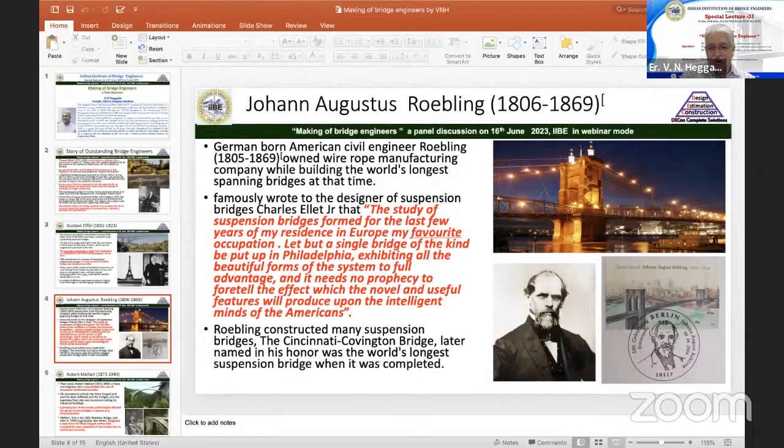Thank you, Rohi, for that nice introduction. If you can just let me have the screen now, if you just come out yourself, I will go to this presentation of mine without wasting any time. Are you able to see my screen? Yes, yes, yes. Okay, fine.

So welcome to this special session of this IIBE lecture number 33, Making of the Bridge Engineers, a panel discussion. In fact, we have some outstanding bridge engineers among us today, Vinay Gupta, Engineer Raj Shirke, as well as Mr. Alok Bhaumik. And the topic basically is making of bridge engineers.

First of all, I thought I'll just give an introduction to this particular panel discussion today before going into our panel discussion, just to understand who are the good bridge engineers. Once we understand who are the bridge engineers, the engineers who are par excellence, then having looked at the characteristics or attributes of these bridge engineers, we'll be able to really discuss on that.

Also the experience of our own good bridge engineers like Mr. Vinay Gupta, Raj Shirke, as well as Alok Bhaumik, you can hear, and we can start the panel discussion. So I'll give you a 10 minute introduction to the topic.

The story of the making of good bridge engineers, in my opinion, starts with Thomas Telford. Way back in 1757, during the period between 1757 and 1834, he really revolutionized bridge engineering, especially in the form of aesthetic bridges. His bridge, namely the Craigellachie Bridge, and another bridge, the suspension bridge which is very famous, the Menai Suspension Bridge as it's called.

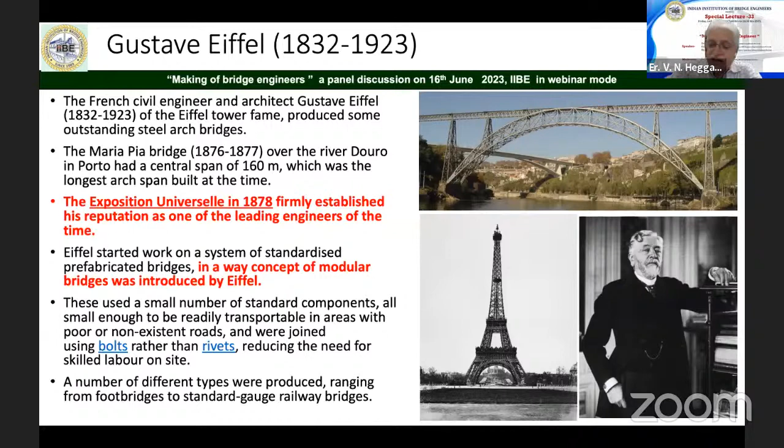Then comes Roebling, and Roebling was very passionate about constructing and designing suspension bridges. All of you are aware of it. During his time, he constructed and designed numerous suspension bridges which were holding the world record. Some of them are the Brooklyn Bridge, which was designed by him but later completed by somebody else. But the Cincinnati Bridge, known as the Roebling Bridge, was in fact designed and constructed by him. He was owning a wire rope company, in fact.

Just to understand the mind of a bridge engineer, you will have to look at the letter written by him to his fellow engineer, Ellet Jr., who was designing one of the suspension bridges at that particular point of time, and Roebling had just moved in. He says: the study of suspension bridges formed, for the last few years of my residence in Europe, my favorite occupation. Let but a single bridge of the kind be put up in Philadelphia, exhibiting all the beautiful forms of the system to full advantage, and it needs no prophecy to foretell the effect the novel and useful features will produce upon the intelligent minds of the Americans.

This is the mindset, or the idiosyncrasy, or the bent of mind Roebling had. That is the kind of passion he had. To commemorate his memory, though he finally settled down in America, born in Germany, the German government released a stamp in his memory, as you can see here on the right hand side of the slide.

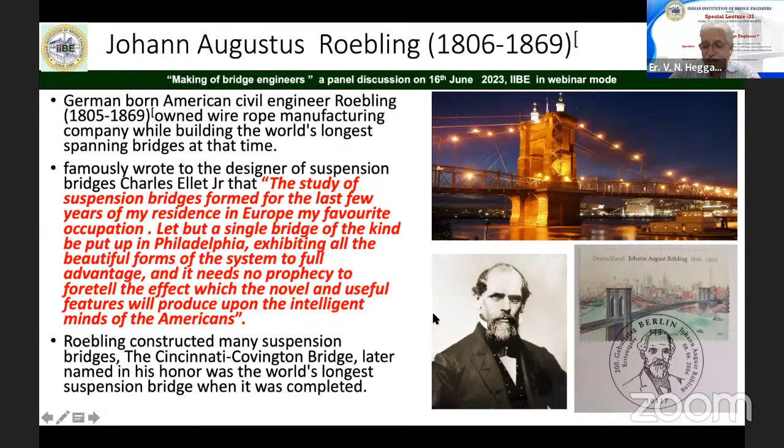Nothing can be compared to the romanticization of Robert Maillart. All of you are aware of it. He revolutionized and romanticized the use of structural reinforced concrete through his beautiful arches, a series of arches he designed and constructed. Mind you, all these people were designers and constructors, not just designers. And in fact, connoisseurs of structural aesthetics liken this series of arch bridges to the poems of a structural poet.

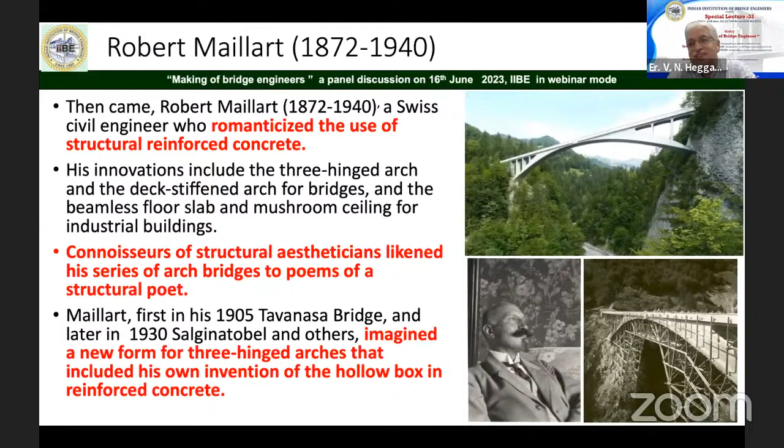And his Salginatobel Bridge, as you can see here on top. It is also said that Robert Maillart was always irked or irritated by complex mathematical calculations. He was more of an imaginative engineer, where problems can be solved by simple mathematics rather than complex algebra or calculus. That kind of engineer he was.

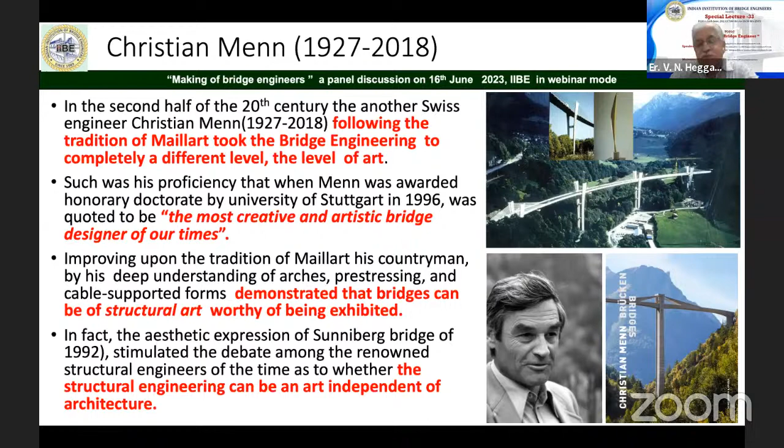Then comes, from the same Swiss tradition, another engineer, Christian Menn. While an honorary doctorate was awarded to him at Stuttgart University, he was hailed to be the most creative and artistic bridge designer of our times. In fact, he demonstrated that bridges can be a structural art worthy of being exhibited. David Billington gives a lot of credit to Christian Menn for taking structural design to the level of structural art. In fact, there were many discussions going on at that particular point of time among famous engineers, whether, like the architecture of buildings, the structural art of bridges should be separated and taught similarly to architecture, differently for bridges. That kind of discussion was going on.

All of us know Eugene Freyssinet, and when you are talking prestressing, he is always synonymous with it. In fact, his passion for the work can again be understood by his own words: 'It was in 1903 that I first had the idea of consolidating concrete by prestressing. It took me 25 years of laboratory tests and much profound thought to discover the difficulties involved and the way of overcoming them. Finally, in 1928, I decided that in order to realize my idea, I would devote all my efforts and all the money that I had earned in 15 years, during which I had worked for the Public Works Company, for the cause of prestressing.'

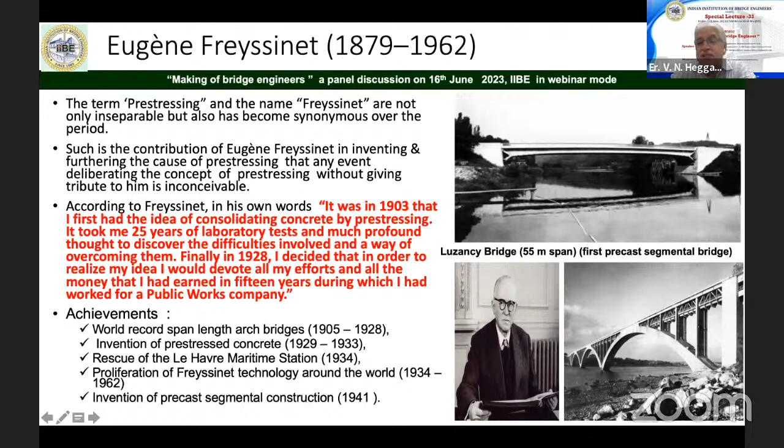That was the kind of passion he had, and he was doing everything hands-on. His achievements were many. During his period he constructed many outstanding, long-standing bridges, and he also proliferated prestressing technology all around the world. In fact, he constructed the first precast segmental bridge in Luzancy, basically in France, way back in 1941, as you can see here. He was the inventor of precast segmental construction using post-tensioning, basically.

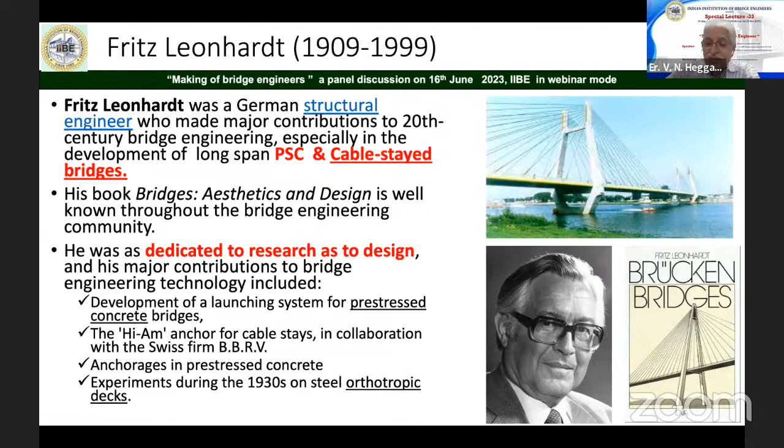Continuing with the tradition of prestressing, all of you know that Leonhardt perfected the art of designing and construction of prestressing in the form of long span as well as cable stay bridges. His book, 'Bridges', which talks about design principles as well as aesthetics, is very well known. For his research as well as his practice, he was given six honorary doctorates across Europe. That was the kind of proficiency Fritz Leonhardt exhibited.

All of us know our own Dr. Jörg Schlaich. He was a professor as well as a structural engineer, and he was a very good friend of India. He was the kind of engineer who could design as well as talk about it fluently, theoretically. In fact, he's in a way a sort of founder of a certain form finding model, which he used extensively in the design of his cable stay bridges and other bridges. His contribution in India is, as all of us know, invaluable.

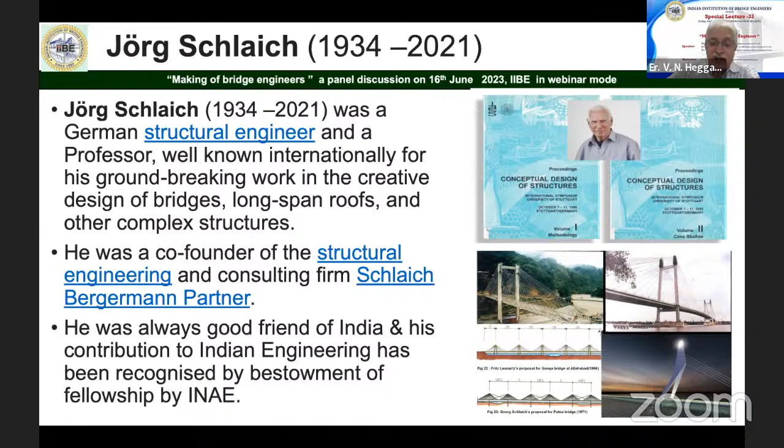So far, till the time of perhaps Dr. Schlaich as well as Michel Virlogeux, the form finding of bridges was done with the principle of form finding by the flow of forces.

Then came Santiago Calatrava. He's held to be a sculptor, architect, as well as structural engineer, and he changed the design concept. The penchant of his sculpture as well as architecture could be seen in his works, even in the bridges, of which he has done many. He started finding the form by forcing the flow of forces to his discretion. That is why it is called form finding by forcing the flow of forces. He's a master in it, and some of his bridges are outstanding.

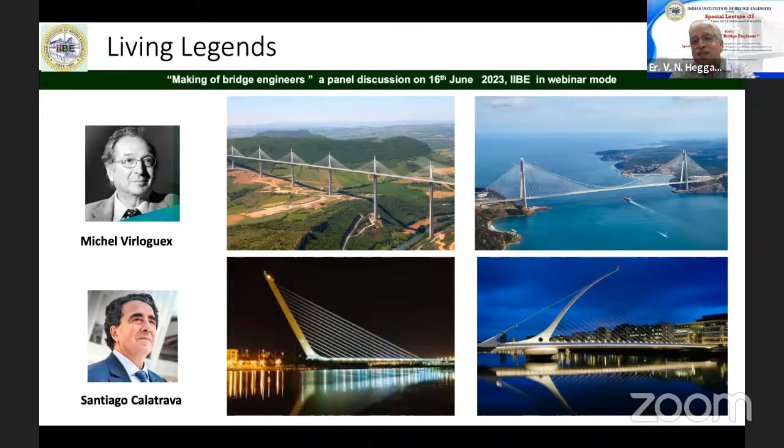Though it is said in the literature that his bridges were a constructor's nightmare, it was always very difficult to construct.

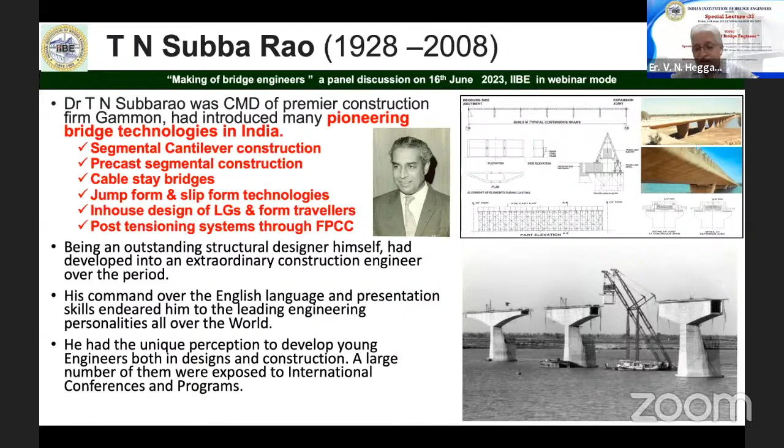Then we know, in the Indian context, Dr. Subbarao, the earlier chairman and managing director of Gammon India Limited. He introduced a lot of pioneering techniques in India, whether it is segmental cantilever construction, precast segmental construction. In fact, he's the one who introduced cable stay bridges to India, even technologies like jump form and slip form, in-house design of launching girders and form travelers, post-tensioning systems through FPCC. In the Indian context, he's one of the great bridge engineers, we can say. His contribution to the bridge engineering fraternity in India is, in my opinion, unmatchable.

Also in the same league we can see Mr. C.R. Alimchandani, who, in his own words, was sent to India to proliferate the cause of prestressing in South Asia, as he kept on saying. I thought one of his best works, stretching the limits in design as well as construction, is that of the Bhima Aqueduct. It's an aqueduct which is circumferentially as well as longitudinally prestressed. Not only that, it had to carry water, meaning it had to be waterproof, and it was done by precast segmental construction technology. That is stretching the limits.

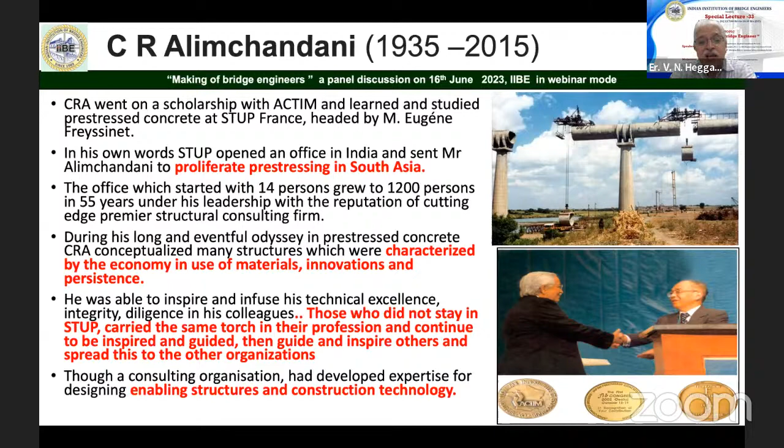He is also responsible for many of the consultancies working in India, and most of the very reputed consultancies, like Tandon Consultants or Spectrum for that matter, and many more, are in my opinion offshoots of Stup Consultants. So I think his contribution to bridge engineering, by giving the country many famous and excellent bridge engineers, is also very invaluable, in my opinion.

So coming to the last slide of mine, what made them bridge engineers par excellence, basically.

I have just tried to put some of the points over here, some of the commonalities or common characteristics which we can see. All of them were bridges between practice and research. You see any of them, especially the international stalwarts we saw, most of them were professors and also practicing engineers.

In fact, even Dr. Subbarao as well as C.R. Alimchandani, to a large extent, did the same thing. They created a bridge between practice and research. They were passionate about their work, very proud of presenting their works in conferences and seminars, and invariably participated in international knowledge dissemination forums like FIB, IABSE, learning from there.

They implemented the learning into practice in their respective countries. That's how they did that. And they were not only good structural designers, but also equally adept with construction engineering. Though they were structural designers, they took a lot of interest in construction technology.

And at the end of their career, over the period, they became some sort of construction experts also. And that's very, very important. They believed that a civil engineer is not complete unless he soils his hands at the site. That is the belief of most of these people, if you really look at it. They have a unique perception of developing youngsters in both design and construction.

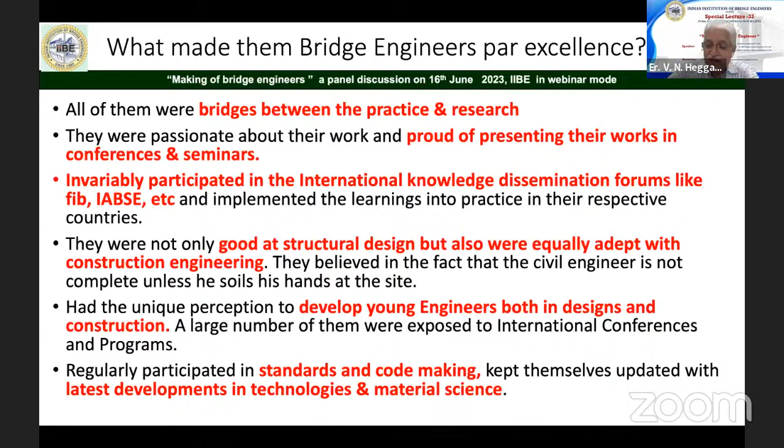So with this, we have come to our today's outstanding bridge engineers, and we are here to hear them - actually speaking, Mr. Vinay Gupta, Alok Bhaumik, as well as Umesh Rajsirke. I've given just an introduction to the topic which we are going to discuss basically today.

And what I will do is request Mr. Vinay Gupta, Rajsirke, as well as Alok Bhaumik, in that order, to give 10 to 15 minutes of presentation on how they have come to this status of being recognized as one of the good bridge engineers of the country, so that from their presentations, we can all benefit and emulate in the future to become good bridge engineers.

And I will introduce first Mr. Vinay Gupta, and he will be talking about this. After that, I will take up Mr. Raj Shirke, then I will introduce the next one. The panel discussion can take place after the completion of all these three speakers, and we'll have a small panel discussion.

After the panel discussion, if there are any questions from the audience, they can be put in the question and answer box. I'll take up the questions for discussing with the panelists.

So with this, I will come to the introduction of Mr. Vinay Gupta. All of you know him, he doesn't require an introduction, in fact. Vinay Gupta is one of our presidents of the Indian Institution of Bridge Engineers. He has, in fact, taken our Bridge Engineering Institute to the next level from the MCBD. It started with MCBD, all of you are aware of it.

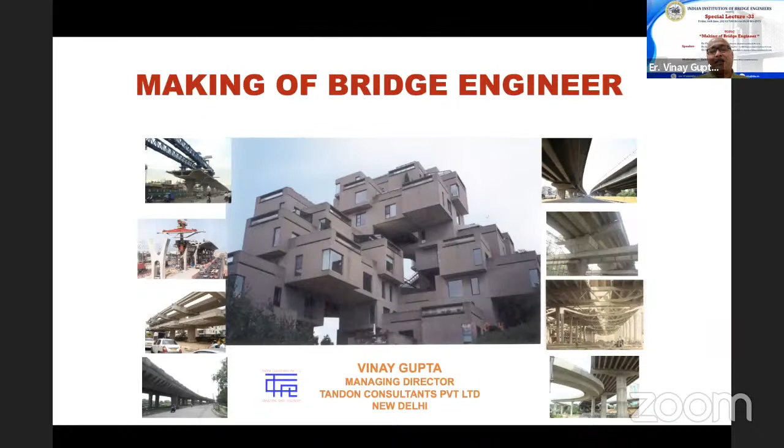As if we are fresh engineers just finishing our graduation in civil engineering, now we need to find our interest, which way we should go. Should we find our interest in buildings, design, or construction? That's a different matter - buildings, bridges, industrial structures, special structures of any kind, materials and testing, highway engineering.

Once we decide, or once we feel inclined into any of these, then we have to see whether we are more interested in consultancy, government job, construction, manufacturing and supply, or project management consultancy, which is mostly the site related supervision, and surveys of any kind. There can be many types of surveys.

We have to certainly find our interest and work towards that, at least in the beginning, and rake ourselves up to see what is my interest. So design can be one, where you do structural designs. Construction can be another - every field has its own glamour. Manufacturing and supply can be another field, wherein you manufacture construction materials, special materials, mechanical products, and things like that for civil engineering - it can even be like a crane, that is also for civil engineering.

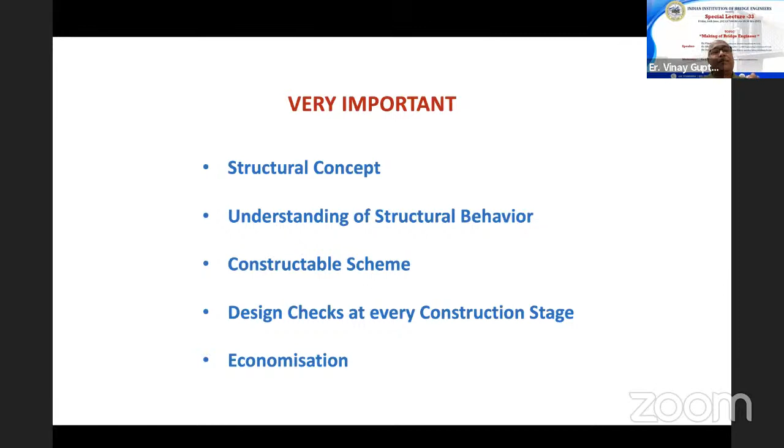And for that, you have to slowly understand which structure would be economical in the given circumstances, unless it is termed an iconic structure where cost is not the criteria, and then it becomes about the shape, the form, the aesthetics.

So coming to my own side of it, I was not driven by anybody 40 years ago. I was on my own. I had no guidance from anybody to decide what to do, going into which engineering. Even 45 years ago, when I entered engineering itself, there was no guidance on which branch I should take.

Somehow I used to see things under construction, especially buildings more so at that time, and I used to take interest in those buildings. I used to wonder why this happens, why this column, why this horizontal member, why this flat slab, etc. These things generated an interest in civil engineering. So I did that, and after doing that, again I did not know where to go.

Somehow I found that if I do consultancy, that's my interest, I also get an opportunity to visit the site and see how construction is done. I was, for myself, looking more happy there. So I said, fine, let me be into consultancy. I had an interview which I applied for, and I got selected in the first one in Delhi itself, and I got into it.

And I got so interested in the analysis, design and detailing. Especially detailing, because I wanted to see how it is constructed. That was my interest, to know that it should be constructible, because the questioning was always there that I'm doing something on my design drawing - how will somebody be constructing it?

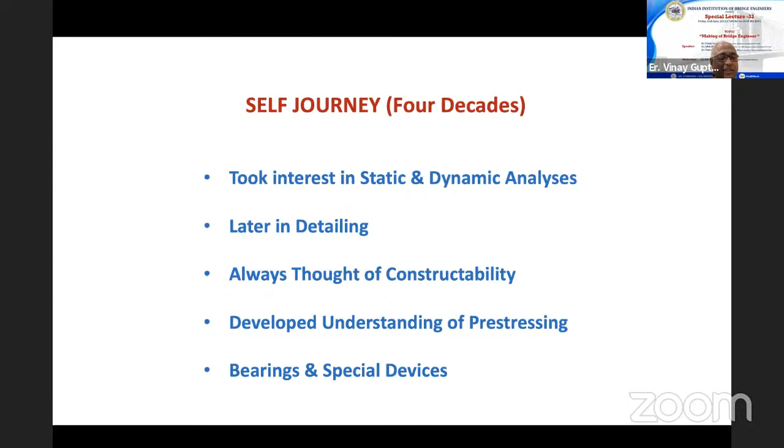Then I got into code preparation, which gave me more enthusiasm and boost. I started taking interest in technical specifications, what all they should be, and prepared quality control documents. All these things are interlinked - specifications, quality control - and you question yourself why things should be done this way and not another way, what are the merits and demerits. When I visited sites, I used to go through testing laboratories to see what they are doing, why, how, and what controls are required. This automatically kept my interest in the field.

Then I started delivering lectures, which gave more boost, imparting what I had collected over the last 30, 35 years - now it's four decades. I also joined several professional bodies. Of late I have been the president of ICI, and now the president of IIBE, and so on.

Now, the advantage of civil engineering that I see in general is that everything you do is constructed, you see it, the public sees it, whether it's a building, a bridge, a chimney, or any other structure. Once you do this, it's automatic appreciation by the masses because people have seen it. They may not openly tell you they liked it or not, but at least they have seen it - there's nothing imaginary, unlike some other fields where you imagine this must be happening. Here everything is in front of you, you see it, appreciate it, like it or dislike it. It gives a kind of confidence.

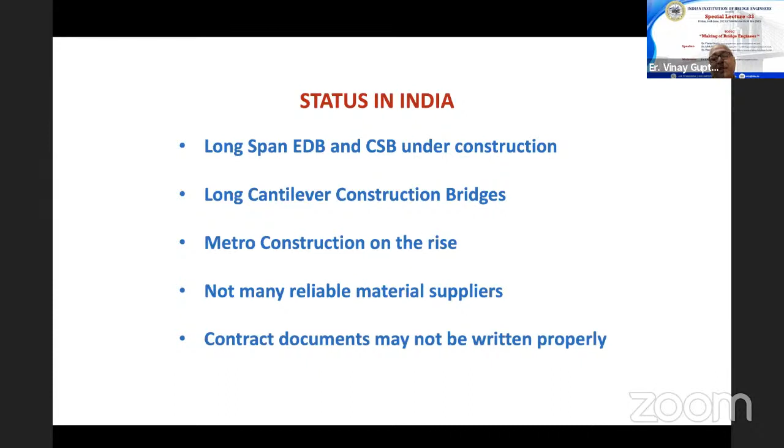But we need reliable material suppliers. We need reliability in every field, and we are a little bit short of it, I must say, in general. There are all kinds, but yes, there are problems. Sometimes the contract documents for construction may not be written properly, so they need to be streamlined in such a way that ambiguities and any kind of debates are reduced to a bare minimum.

In fact, I have been a member of course building committees, where I've always said, make bridge a compulsory course. Let people learn. When they learn building, let them also learn bridges. Make site visits, take students to site and let them realize, understand, and appreciate. That may also create enthusiasm in them to become civil engineers when they look at the site and see things happening.

Then, since educators, the faculty, taught us a lot of basic concepts, and we in industry are applying these concepts for implementation. We are the implementers. Now there must be an interaction between industry, that is we people, and the academics, so that the faculty as well as the students learn how what they taught has been implemented, and what they need to teach their students.

Thank you, Mr. Hegde. First of all, I must thank the Indian Institution of Bridge Engineers for giving me this opportunity to speak about a subject I'm very passionate about - making a bridge engineer. I have been lecturing at many places trying to encourage young engineers to come into the field of bridge engineering. So this subject is very much my choice.

We have heard Mr. Hegde's initial opening remarks, an excellent presentation giving background for this topic. Thereafter we heard Mr. Vinay Gupta, another very good presentation giving a complete picture of how he grew up as a bridge engineer and what should be done, what are the various fields - excellent presentation. In this short presentation, what I plan to give is an insight into how I grew as a bridge engineer over the last 40 plus years, and I would like to share my thoughts on how one should approach the challenge of becoming a good bridge engineer.

Just to mention, a bridge is not just a structure that fulfills the functional requirement of crossing a river or an obstacle - that's the way many people look at it, just like another structure. But it's not that. A bridge connects people. It has to meet the social, environmental, and cultural needs, because many times a bridge is an imposing structure in the built habitat, so it should not be treated just like any other structure by a structural engineer.

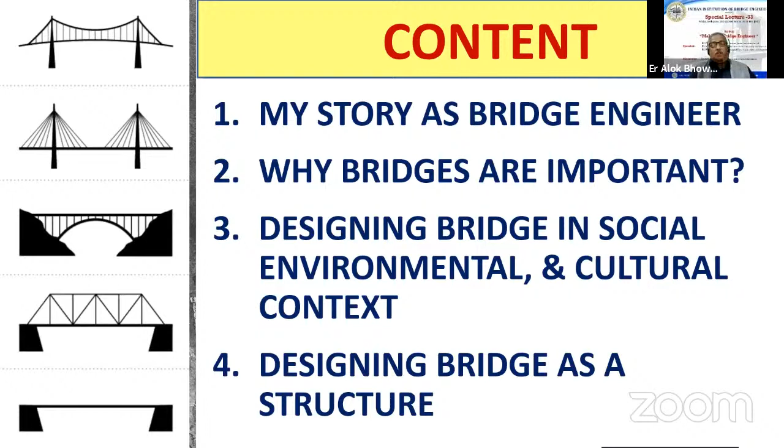And last, I will talk about the designing of bridge as a structure. This is the last in the priority, in my view - that is relatively an easy part. Once you understand the importance of a bridge, once you understand the social, cultural, and environmental context, designing of the bridge is the easier part of the work.

So let me begin with my story. What you see here is my name card with a long list of credentials. Generally, I don't use these long lists in my letterhead or anywhere. There is a specific purpose for which I am showing this here. This slide illustrates the learning path that I had gone through since I graduated in 1981. I passed out from Delhi University, BSc Civil Engineering.

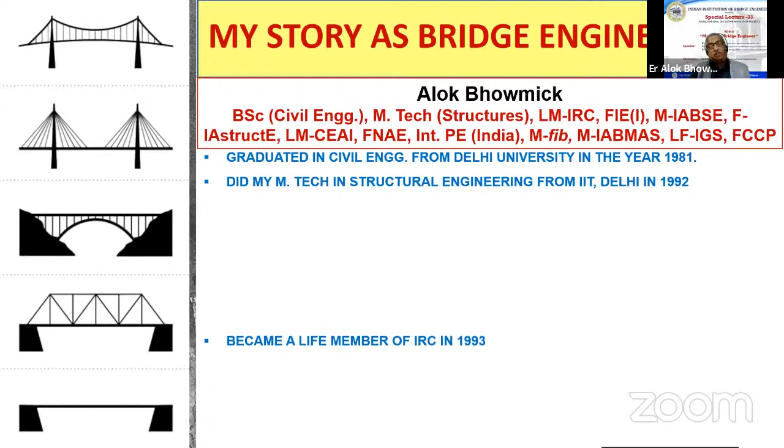When I did my post-graduation from IIT Delhi in 1992, I was a part-time student there. At the time I was working in a consulting field. I became a life member of Indian Roads Congress in 1993, became a member of Institution of Engineers India in 1995. Later in 2002, I became a fellow. I took the membership of IABSE in 1995. I became a fellow of IAStructE in 2005, and I served Indian Association of Structural Engineers as president from 2019 to 21. I took life membership of CEAI in 2018.

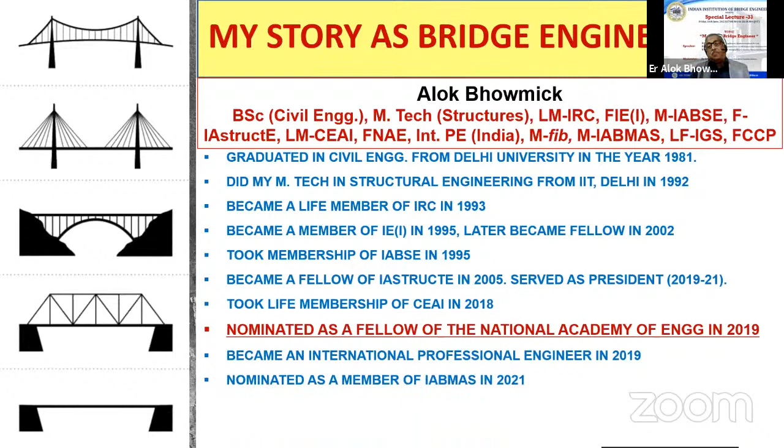I was nominated as a fellow of the National Academy of Engineering. I consider this as one of the topmost honors that I have, in 2019. I became an international professional engineer in 2019. I was nominated as a member of IABMAS, which is the International Association for Bridge Management and Safety, in 2021. I became Life Fellow of Indian Geotechnical Society and a Governing Council member in 2022. And I also appeared for an exam and qualified as an FIDIC Certified Consulting Professional in 2022.

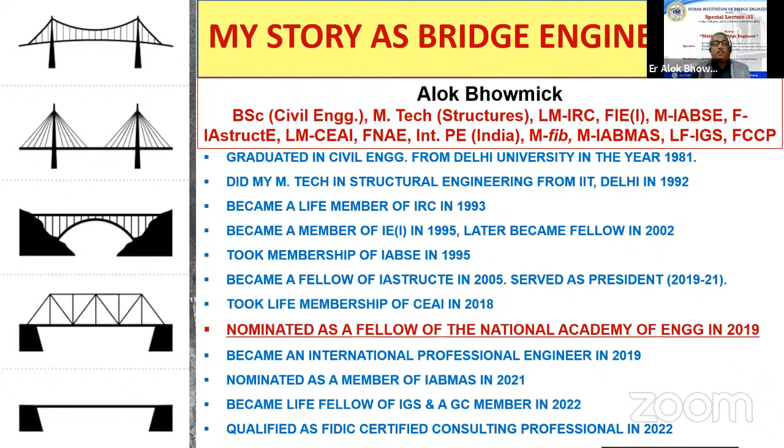Reason I'm showing all this is to highlight the fact that if you want to grow and become a good professional who would be recognized, then you need to be continuously upgrading your skills. That is the first lesson which I want the participants to learn. You can see I have been continuously upgrading my skills, which has helped me immensely in the profession. All these professional associations of which I'm a member have helped me maintain high professional standards, which in my view is very much required - the fact that you are following certain codes of conduct given in these professional associations means that you are on the right track. And I think this helps you a great deal as an engineer.

Now coming to the industry experience, after graduation I worked for about 15 years in various consulting firms. The last one being in Malaysia with a firm called HSS Integrated Sendirian Berhad. And in all these consulting organizations I have worked in bridges. Last 20 years, I have been on my own, started 20 years back with my wife as a partner. She is also a bridge engineer, civil engineer, and structural engineer.

Initially when we started, there were a lot of advices from my friends, most of them negative, saying that it's a stupid idea to start a structural engineering consultancy - there is no money. And to a large extent, maybe they are right. But I had some passion in the consulting, and despite all the advices against, I started.

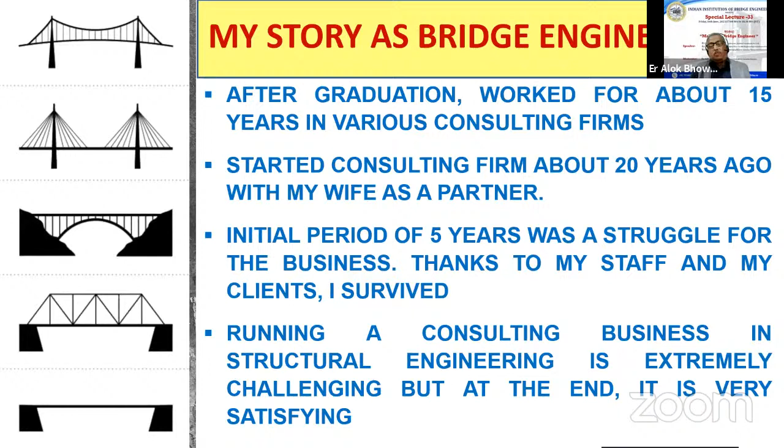And I can tell you that the first 5 years when I started were really a struggle. Thanks to my staff and also my clients that I survived. Thereafter, of course, it was an enjoyable journey, and I'm still enjoying the challenges, both as a structural engineer and also as a businessman. The challenges that I'm facing day in and day out give me a lot of pleasure. It gives me a lot of satisfaction.

Coming to the next section, why bridges are important. Bridges are indeed important for society. I have explained that before, because they connect people and link communities. As a bridge engineer, we must be aware of the societal needs that bridges fulfill, and we must be sensitive to the expectations of the public, developing skills so these requirements can be fulfilled. It is not sufficient to just fulfill the requirement of your immediate client as per the terms of reference and tick the box. That is not what bridge engineering is all about. Your ultimate client is society, the public, and you need to win the hearts and minds of the people you are delivering for. This is to be remembered.

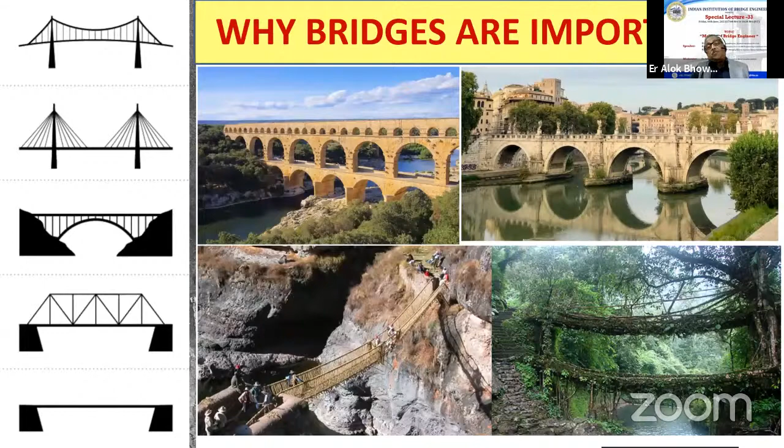So bridges are not just a structure which connects. If you study these bridges, what you see in the bottom right is the timber bridges in Meghalaya from long back, called living root bridges. These are ancient bridges where people used their minds and wisdom. What you see on the bottom left is the grass rope bridge, made with leaves and tree trunks, which have a limited life of one or two years, and the community keeps rebuilding them. This is the kind of history of bridge engineering we are talking about.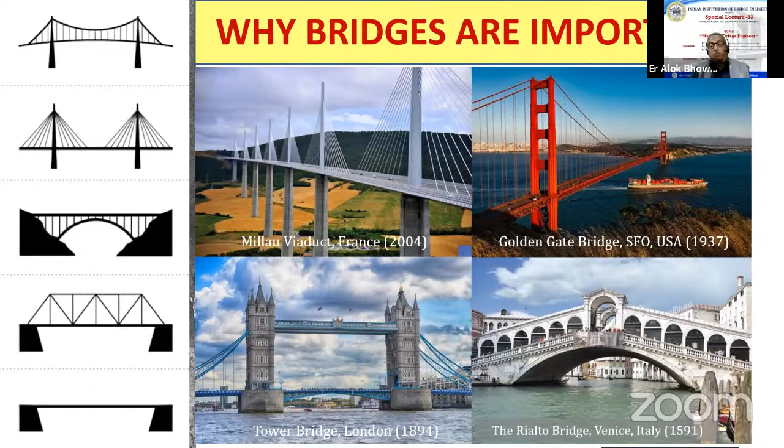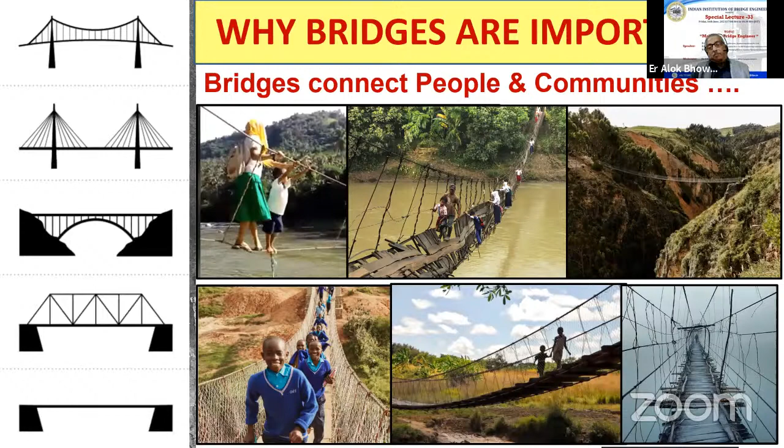There are other bridges which are lifelines in rural areas. Even today, there are more than one billion people living in poor and rural communities around the world, who do not have easy access to basic needs. For them, these bridges provide connectivity so their children can go to school and college, and they can visit health centers. So as a bridge engineer, when you design a bridge, we have a duty not just to address the functional requirement, but also to make them robust. There is a video, a four-minute video by the World Bank, recently created, which I got just yesterday and wish the organizers would show after this presentation. It shows how bridges have helped bring resilience in Uttarakhand after the 2013 floods. That is the kind of responsibility a bridge engineer needs to understand when he takes up this subject.

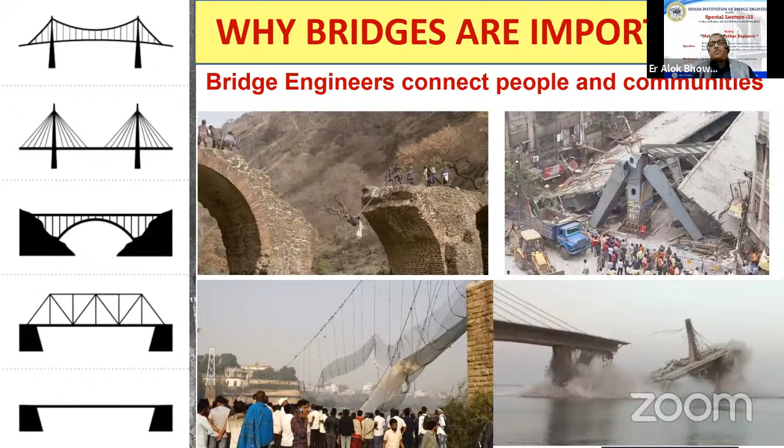We have seen many failures, such as the failure of the Bhagalpur Sultanganj Bridge. When a bridge fails, the community struggles, and development stagnates in that city, particularly when an operational bridge fails. People suffer, and apart from the huge economic impact, even during construction if a bridge fails, it delays the project by maybe 5, 6, or 10 years. So the whole community struggles when a bridge fails. That may not be true when a building fails, where the damage is only localized, whereas when a bridge fails, the entire community suffers. We need to understand this. Now, coming to designing the bridge in social, environmental, and cultural context, let me talk a little bit about this.

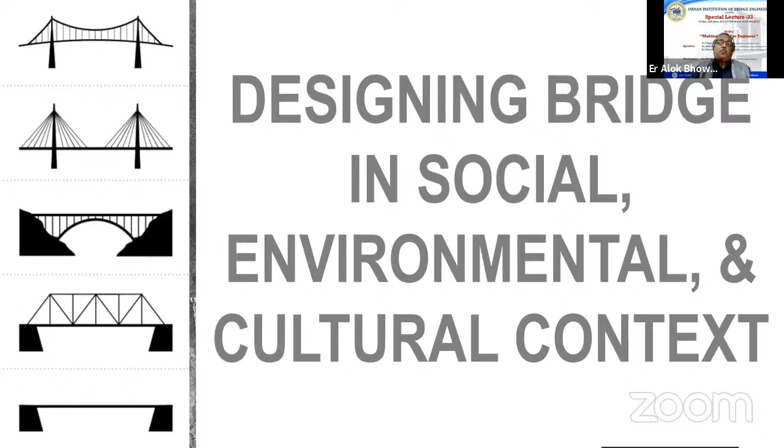There is a need for taking into consideration the environmental factors and the societal factors. We are, as you all know, in a climate emergency today. This is a completely new paradigm where we have to think differently. It is not there in any textbook or in any codes or standards that we have been following so far. We have to develop a new standard for us. Reducing greenhouse gas emissions, reducing the carbon footprint in bridge construction is an added challenge today for bridge engineers. As we all know, these bridges that we are constructing have a very high embodied carbon, and therefore there's a great challenge forced upon us to reduce the carbon footprints.

The bridge design considerations are also different depending upon what type of bridges we are designing for. When we are designing railway bridges, I'm not just talking about the difference in the loads - that is, of course, there. But other than that, the attention to detail also will keep changing depending upon the functionality of the bridge in the environmental and social context.

For example, if you are designing the railing and other things for a railway bridge where the vehicle moves at a very high speed, you don't need to pay much attention on the detail of the railing. Whereas when you are designing a pedestrian bridge where the movement of people is slow, they will be on the railing, they will be walking along the pavement. The details of the pavement, the details of railing, the details of illumination on top of the deck are extremely important, other than the structural detail.

When you are designing, for example, an urban highway bridge, all the details matter because one can be moving on the surface level, one can be moving on top. Each and every detail has to be looked into from the social context.

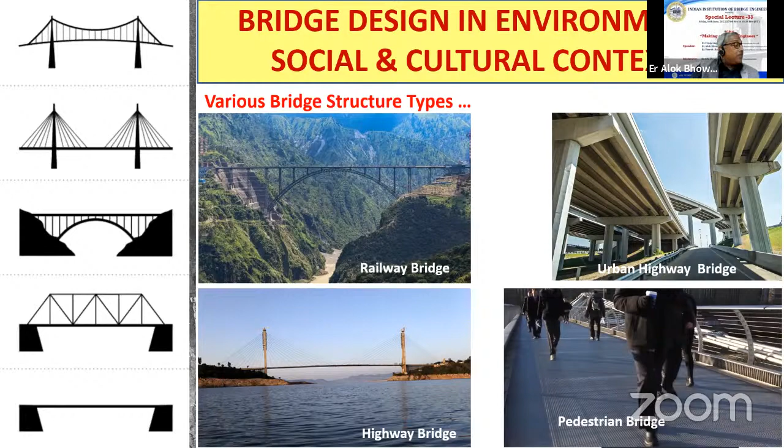These are some bridges which I think Mr. Hegde also touched upon, that we need, as a bridge engineer, to derive inspiration from great works done by our predecessors, our role models. These are just a few examples. One is this bridge, the Millau Viaduct - a stunning bridge in south of France, designed by not only Michel Virlogeux of France, but also, I think, Norman Foster. Together, jointly, they have done this spectacular bridge, which is a spectacular synergy of architecture and engineering, as Mr. Hegde mentioned.

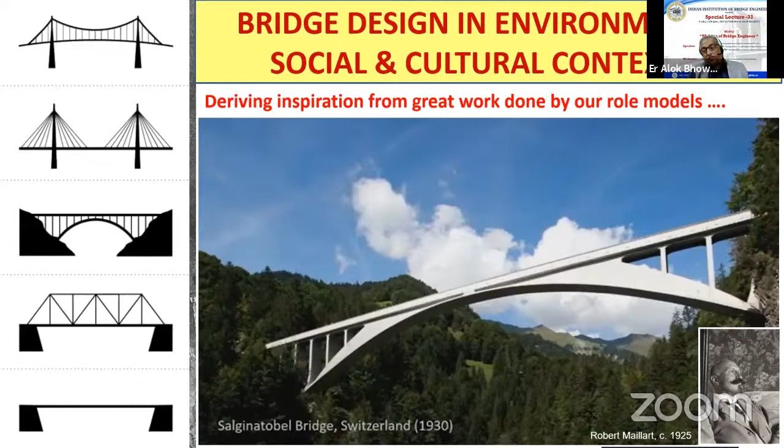He also showed this Salginatobel Bridge in Switzerland, which was designed in 1930 by Robert Maillart, and I think he also did the construction. It's an absolute sublime bridge - a masterpiece, and even today, when tourists visit the area, this is also one of the tourist spots there.

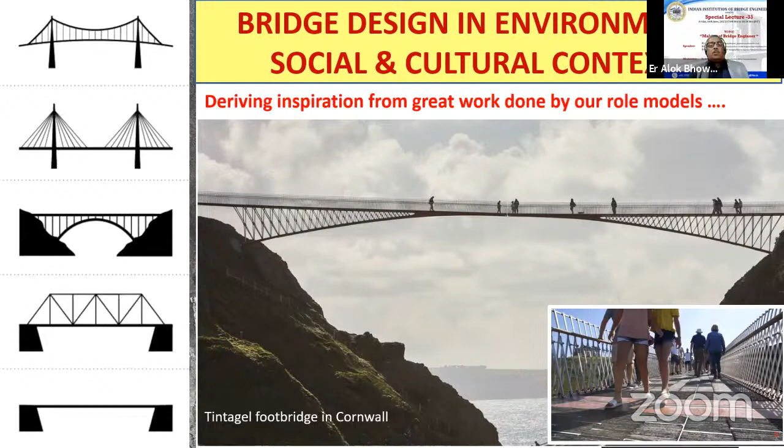And mind you, these are not just iconic or signature bridge structures. It's not that because it is a signature structure, it has to be good - there are routine bridges as well which have to be good. I will quickly go through some of these bridges from which we draw a lot of inspiration.

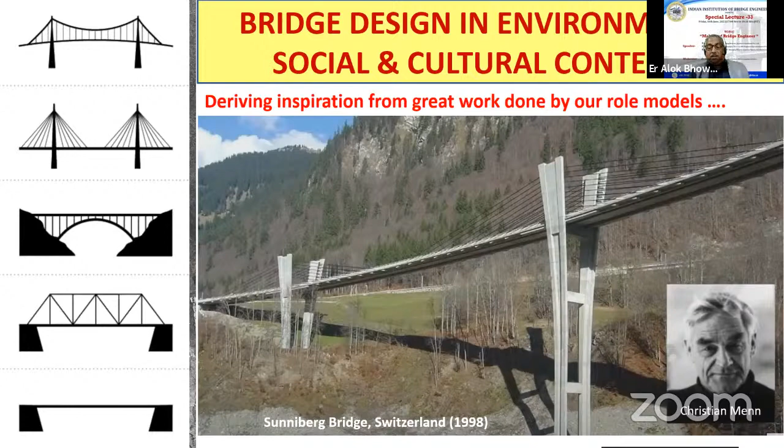This is one in Switzerland done by Christian Menn. I think Mr. Hegde mentioned about Christian Menn and also his works. This is a bridge designed by Jörg Schlaich, father of our friend Mike Schlaich, who has been very instrumental in many projects. Both father and son were instrumental in, I think, several projects in India, including Vidyasagar Setu and Signature Bridge, Delhi. And this footbridge is one of his masterpiece creations.

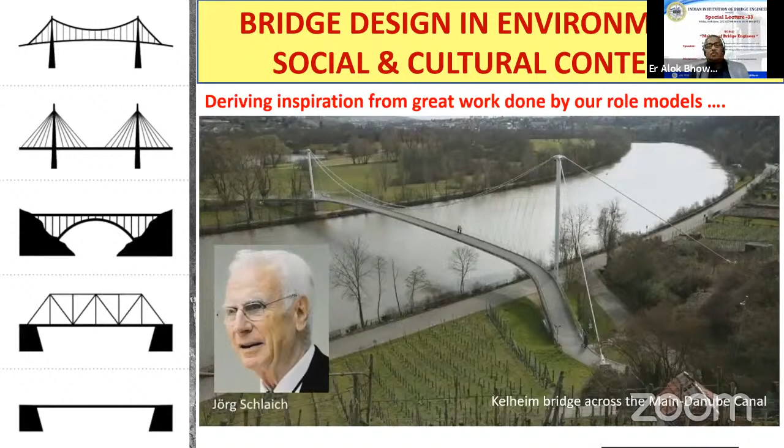Jörg Schlaich, by the way, is not only a passionate structural engineer - he has not only excelled in bridges, but I think he has done pioneering work in lightweight construction using tensile structures, solar energy, and name any of these and go through the work done by him. It is very, very inspiring.

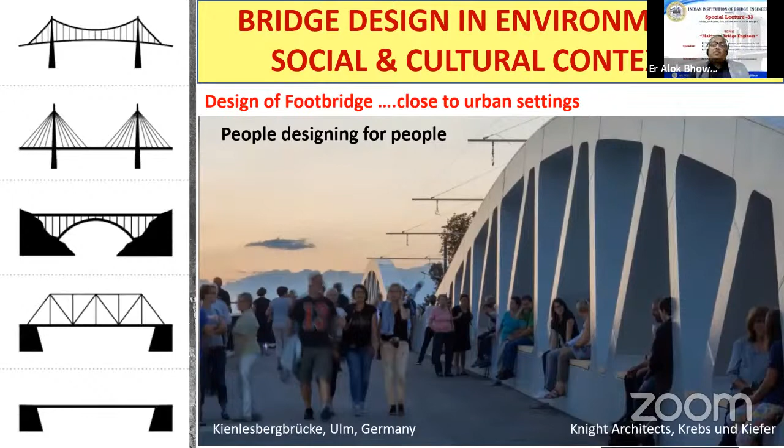This is a good example I wanted to show, something different - a footbridge in an urban setting, an award-winning bridge, showing how the bridge detail connects so well with pedestrians. You see, it's part of the design that this bowstring arch bridge keeps the top of the bottom chord at a level intentionally kept for pedestrians in this urban area to sit leisurely, gossip - this is what contextual design means. We have some bridges in India which are very inspirational, but unfortunately they are few and far between.

Unfortunately, our academic institutions and engineering colleges do not teach aesthetics for structural engineers the way it should be taught. And that is perhaps one reason why many of us in the profession are insensitive to aesthetics.

Even if there is a cost addition of 1% or 2%, generally the client would say, 'No, let's go with this one instead.' Look at metros in Delhi - I have seen in many corridors, the same corridor, two columns will be circular, the next one, due to some reason, becomes rectangular, and the next will be a different shape. Suddenly, from a box girder you will convert into an I-girder. Nobody is looking at the whole project in integrity as one.

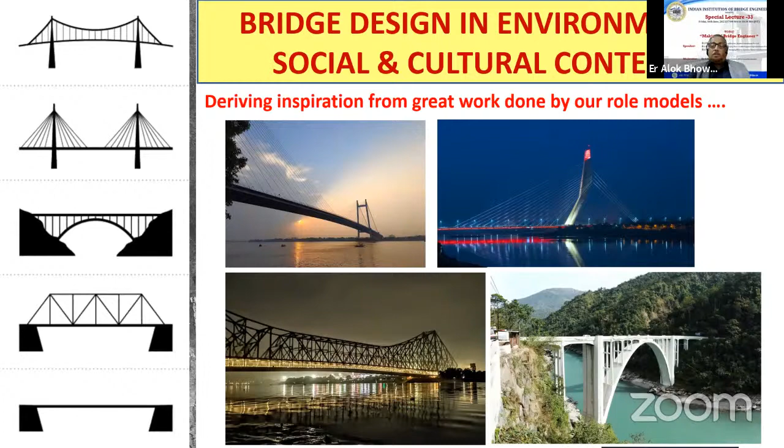This is an area where, as an engineer, you need to create your own kind of expertise and make sure that it is aesthetic.

I'll give two examples of what you should not do. One is the famous Alamillo Bridge, which Mr. Hegde also mentioned - a Santiago Calatrava creation. When you design a bridge, you have to satisfy the requirements of cost, optimization, aesthetics, integration, environment - everything. It's not just to meet one criterion and forget the others. The Alamillo Bridge in Spain is a good example where aesthetics have been satisfied more than required there, and as Mr. Hegde mentioned, form follows function was completely reversed - that is the trend of Santiago Calatrava.

This bridge cost almost 5 times the normal cost of a bridge, and therefore the public there and the authorities heavily criticized it. Even after post-construction it was a matter of criticism. But if you look at the bridge, it is one of the icons there, aesthetically very good.

Look at another example which is not acceptable - the Delhi Metro structure in Delhi. I took two photographs. This is in the heart of the urban area, and you can see how it's treated - when you have a long span with height, and suddenly a short span. Not only that, the painting is done only where vehicles cross at the center, as if the other part doesn't require painting. This is very insensitive.

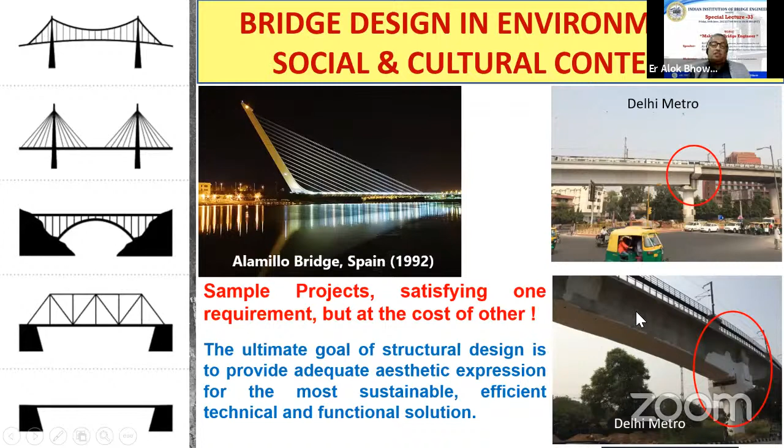Look at the one at the bottom - this is a very insensitive way of maintaining our structures from an aesthetic consideration. It only shows insensitivity to aesthetics.

Coming to the last part of my presentation - how does a bridge engineer go about conceptualizing and creating a structure that satisfies all the stated and unstated requirements I mentioned earlier. There are 4 stages of a bridge project: first a concept design, then a preliminary design, then a detailed design, and a construction stage. The purpose of conceptual design is to come up with various feasible bridge schemes, decide on one or more final alignments, decide the alignment and overall design, and decide the broad concept for further consideration.

Concept design is a process of form finding, as Mr. Hegde was mentioning, which is the most important phase of the design. Generally, it is a very experienced person who works on the concept design - this is the initial but most crucial step in the bridge project. Mostly this is the responsibility of the client or the feasibility consultant, the DPR consultant, and in some cases even the contractor does the conceptual design, though generally it is the client and DPR or feasibility consultant who does this.

When it comes to preliminary and detailed design, that is the next stage. The purpose of preliminary design is to select the best scheme from the proposed concepts, ascertain the feasibility and constructability of the selected concept, and finally refine its detail and estimates, based on which the tenders are floated.

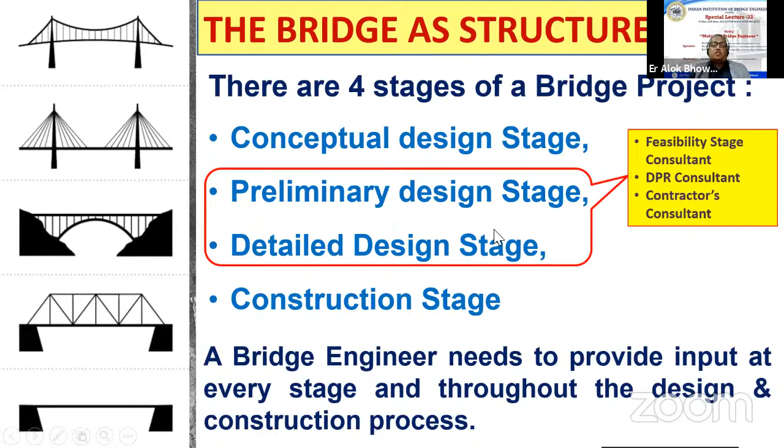The construction design will be much more elaborate, where each and every stage of construction will have to be analyzed in great detail, as Mr. Vinay Gupta was mentioning. Mostly in an EPC mode of contract, this is done by the contractor's design consultant. A bridge engineer needs to provide input at every stage, be it at the feasibility stage, DPR stage, or as a contractor's designer.

So if you want to be a good bridge engineer, you have to learn all these four stages very meticulously, and that is where the experience lies.

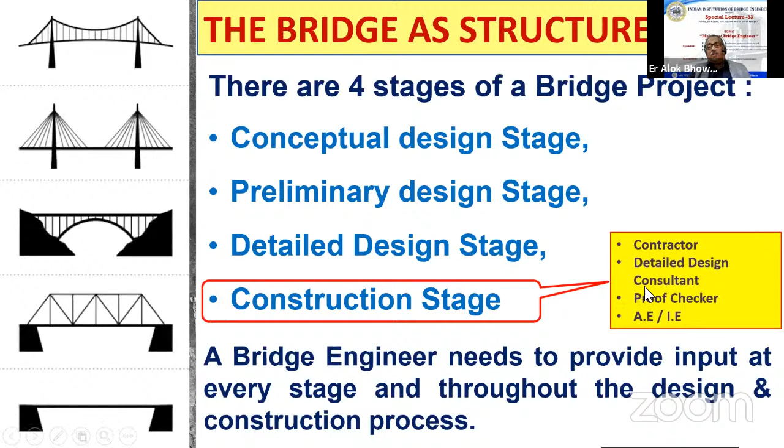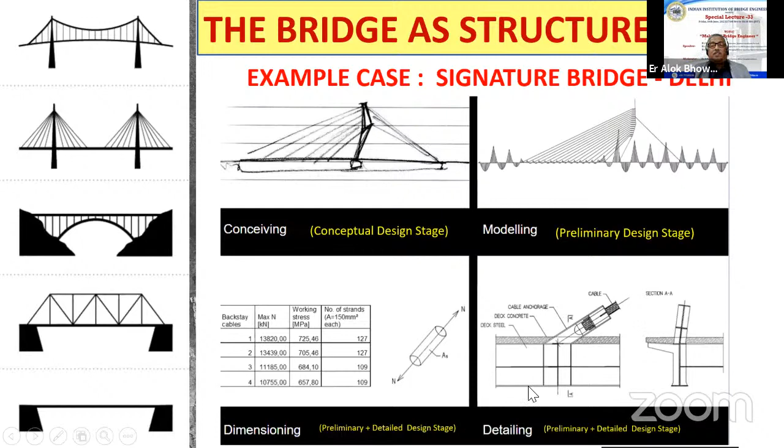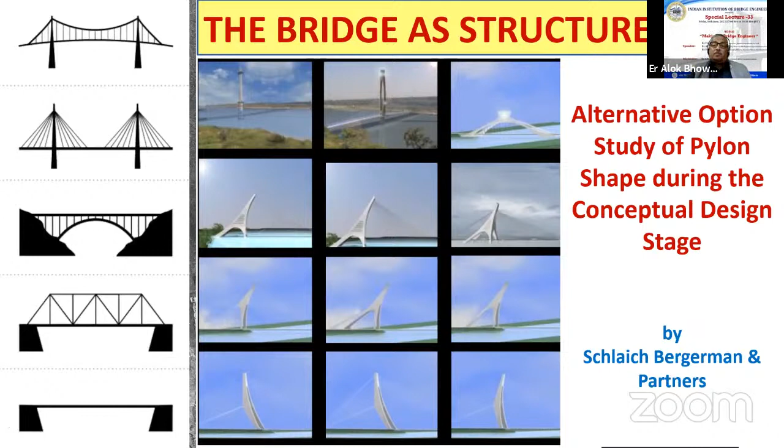But you have to understand the very basic concept: you need to study various concepts, whether it is a simple bridge, a complicated bridge, or a signature bridge. You need to come out with various alternative concepts, weigh the pros and cons from cost, aesthetics, and all aspects, prepare a matrix, give them some weightage, and finally choose a solution best suited to that particular structure.

So in conclusion, I would like to say that bridge design today is a multidisciplinary task. All different expertise is needed when we build a bridge. It is not just a structure to be designed with steel and concrete where you only optimize the cost - no, that is not so.

Today we are in a climate emergency. We have to take care of the climate. It is the politics that we need to worry about. It is the environment that we need to worry about. And it is the natural resources that get recycled that we need to worry about. All this comprises a bridge design activity.

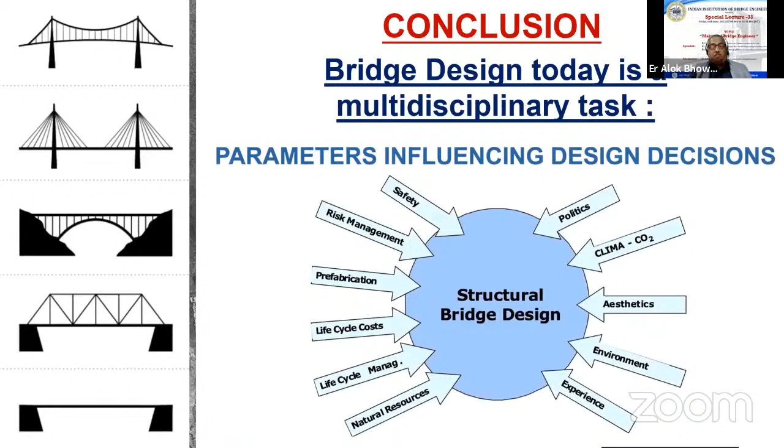It's not necessary that you have to be an expert in everything. But if you want to take a lead as a bridge engineer, you need to understand each and everything. You may not be an expert - you may be taking the expertise of one particular aspect, but in other aspects you should have fairly good knowledge so that you can be at the decision-making table, taking a lead position.

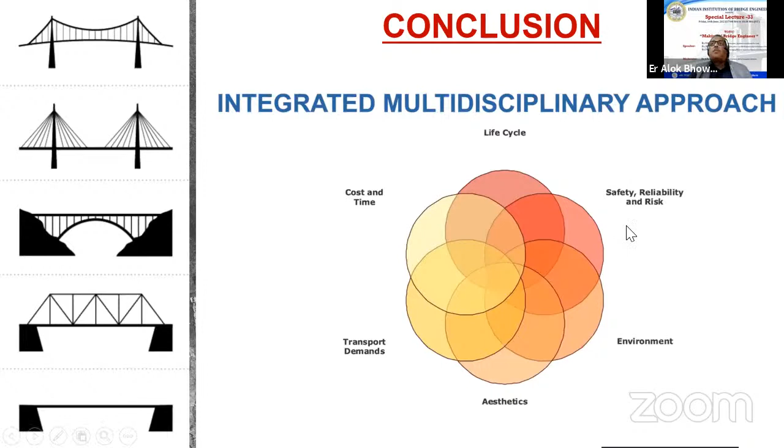Bridge engineers have to adopt an integrated multidisciplinary approach, pooling the knowledge of all special experts into one unit and creating this structure we call a bridge.

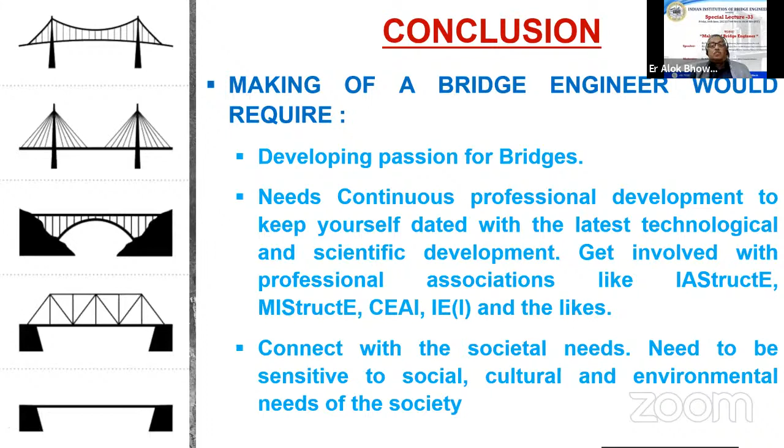So, last slide: making of a bridge engineer would require developing a passion for bridges. There is a need for continuous professional development to keep yourself updated with the latest technological and scientific developments. Get involved with professional associations like IAStructE, IIB, MIStructE, CEAI, Institution of Engineers, and the likes. Connect with societal needs - you need to be sensitive to social, cultural, and environmental needs of society.

Innovation is vital in bridge engineering. It should be in the DNA of every bridge engineer. One can't be a good bridge engineer if she isn't wanting to innovate. You just don't follow conventions and be happy - every structure is unique, every bridge is unique, and you can find something new and learn something new in that.

But only a word of caution is that innovation shall be done from a position of knowledge and strength. It's not a good idea to do innovation with half knowledge. That will be dangerous because safety is a prime concern here.

Thank you very much. With that, I have come to the conclusion of my session. I think I have taken a little more time than what is allotted, but yeah, thank you, Alok.

I think though you have taken time, it has been a fascinating journey as a bridge engineer. I can see that. And also you have explained what inspires you, like showing examples of Calatrava, and so many good engineers like Schlaich, Christian Menn, and Robert Maillart. And that's what the inspiration is all about. And also, in a way, you have explained the design process, which is a good design process that has to be followed. We'll take up all these things at the end of Mr. Umesh Rajeshirke's talk as a panel discussion. If time permits, we'll have a long discussion over there. And with this, I invite our next speaker, Mr. Umesh Rajeshirke.

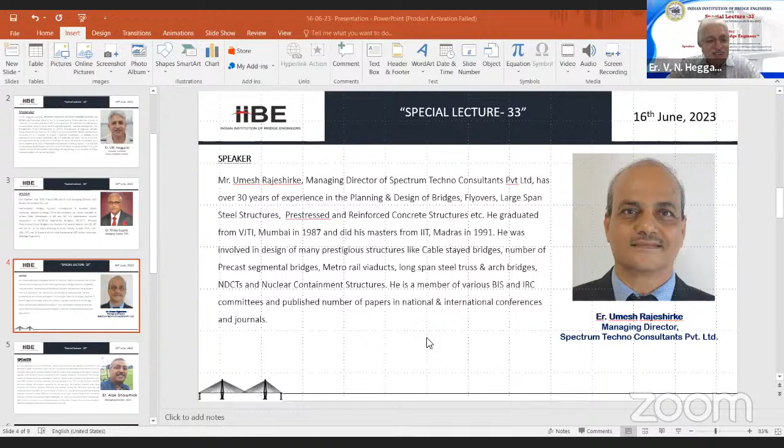Umesh Rajeshirke is a first generation entrepreneur, similar to Alok Bhowmik. He had worked in Stup and was one of the prominent engineers of Stup Consultants. Stup has produced some of the finest bridge engineers, not only bridge engineers but structural engineers in this country, and his consultancy firm, Spectrum, is one of the offshoots of Stup Consultants. Rajeshirke is a postgraduate from VJTI, graduate from VJTI, and did his post-graduation from IIT Madras. He has been involved in cable stay bridges and long span cantilever bridges, and in addition, in the design of nuclear containment structures, natural draft cooling towers, etc. He regularly attends international FIB as well as IABSE symposiums and conferences. Our country has very few designers who have done multi-span cable supported bridges. I think Rajeshirke is one of the very few multi-span cable stay bridge designers in this country.

With this small introduction, Shirke, I'll hand over this podium so you can take over. You have 10 minutes, if it's possible for you to complete. Actually, what has happened, Heggadeji, is that all three of you have already spoken most of the things which I had covered in my presentation. So while you were speaking, I have deleted many slides in my presentation. Fine, fine, so that will make things... I may take hardly 5 to 10 minutes. I will not go through all the things which all of you have talked about earlier.

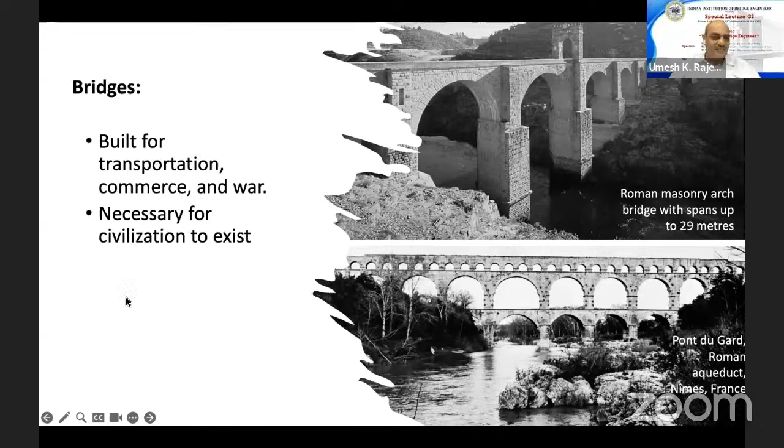So this is again, bridges built for transportation, commerce, and also for war. During many wars, the attempt is to destroy the bridges to win the war. So that is another aspect of the bridge we should mention. It is necessary for civilization to exist. And again, as all of you have said, these are iconic structures. Many cities are identified by the bridges they have in their cities. And hence it is obviously the most exciting career in civil engineering.

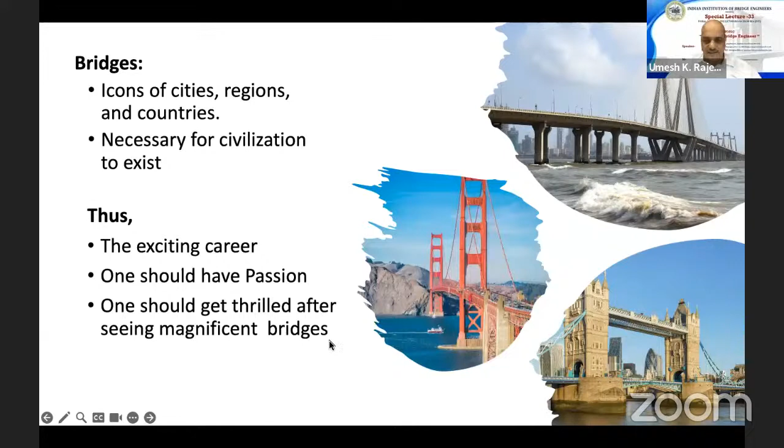One should have a passion to build that career and should get thrilled after seeing these magnificent bridges. And the most important or fascinating thing is that you deal directly with nature. That is the excitement I find. You have to deal with gravity, you have to deal with wind, the kind that the cyclone has been making noise about in the last 2-3 days. Then you have to design for earthquake, moving loads, cyclic loads, fatigue. So that makes these particular structures very interesting for any engineer.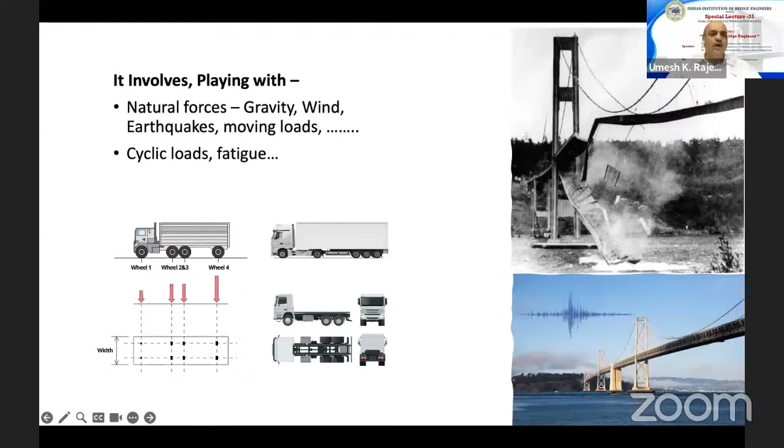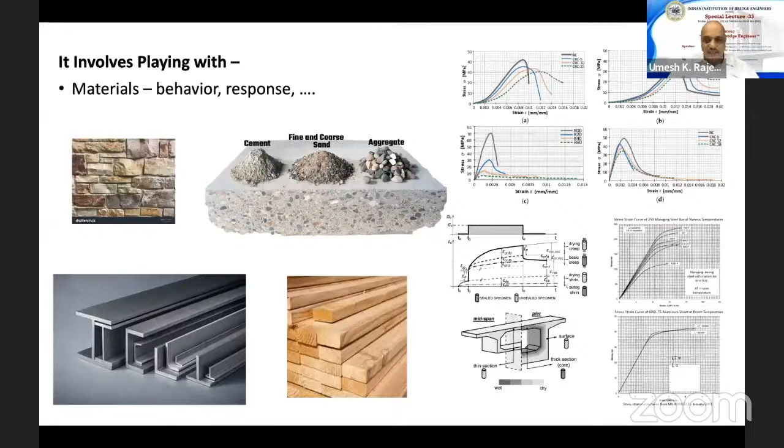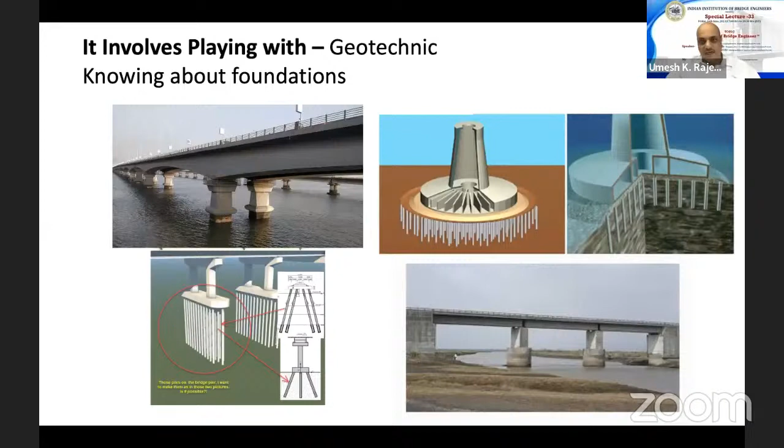And then you have to play with the material, whether it is masonry, concrete, steel, or timber. You have to play with their material properties, their response to loads, long-term, short-term, creep, shrinkage, fatigue, whatever it is. So we have to learn those properties and play with this material. Again, you have to play with another uncertainty, that is the foundation. There are a number of foundations like the open foundation for the Thane Creek Bridge, pile foundations for many bridges, and well foundations. So you have to choose the appropriate foundation. That is again a very important decision we make. Again, you have to play with a number of structural systems, as Alok and others have said in detail. So in the concept and planning stage, you have to choose the appropriate structural system. You have to see the constructability, the cost and economics of that particular solution.

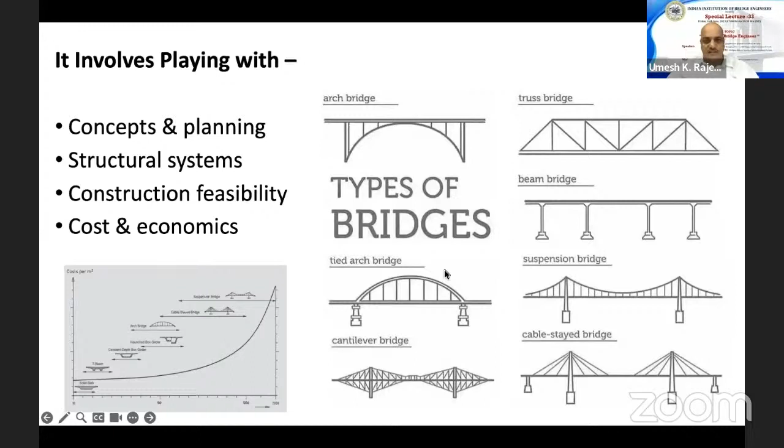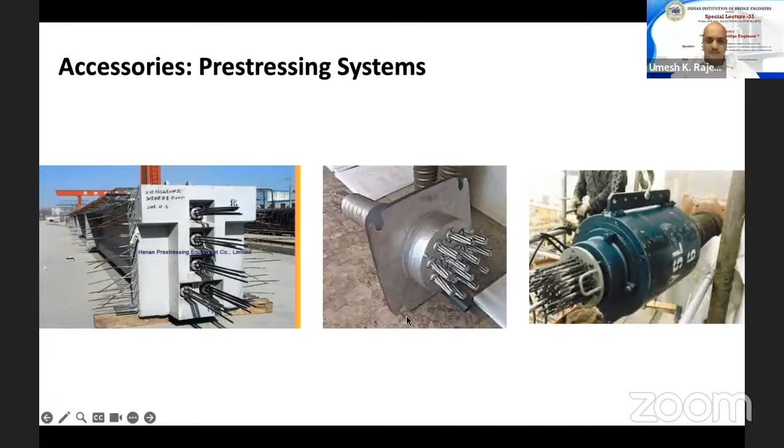Along with that, you should know the various accessories used in building these bridges, like the prestressing system, or say the bearings or expansion joints. Then obviously the construction methods, whether it's precast or cast in situ, balance cantilevering, and so many others.

And along with that, as an engineer, you should be very proficient with project management, whether it is in a design office or at a site. So that is one of the important aspects of being a bridge engineer.

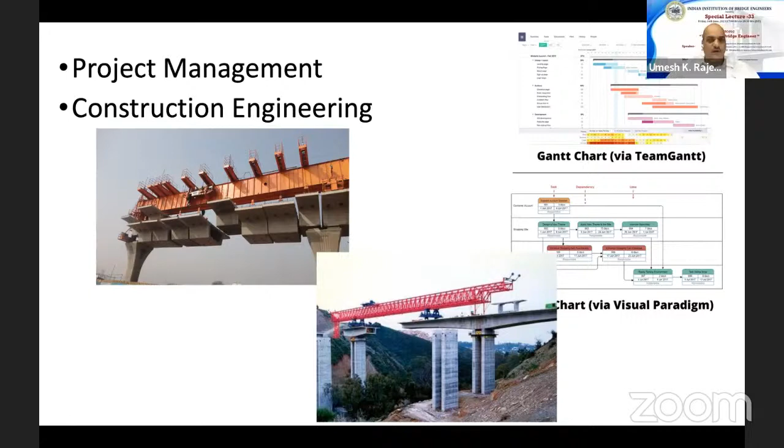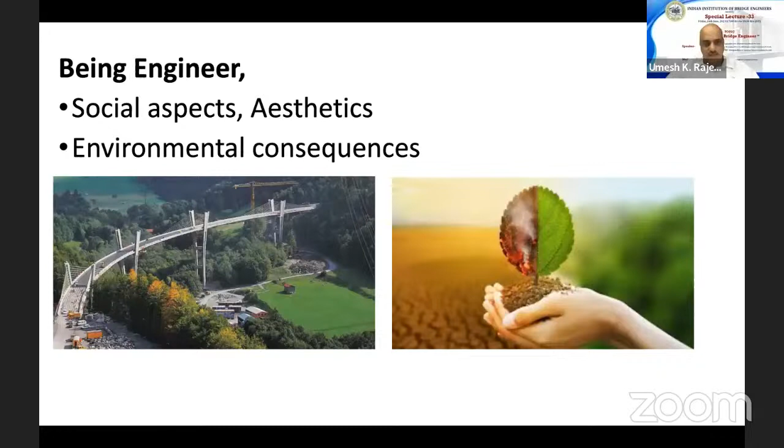Again, what Alok and all of you have said, the social aspect, aesthetics, environmental consequences, and so on, so I will not repeat here. So, making a bridge engineer, see what I feel...

The bridge engineer is not some special kind of engineer. He is mainly a civil engineer. Among the civil engineers, there are a few structural engineers or construction engineers, and from that, some people do the design of bridges. So actually, it is a subset of the entire civil engineering, then structural engineering, then bridge engineering. And that doesn't mean these bridge engineers don't do any other structures.

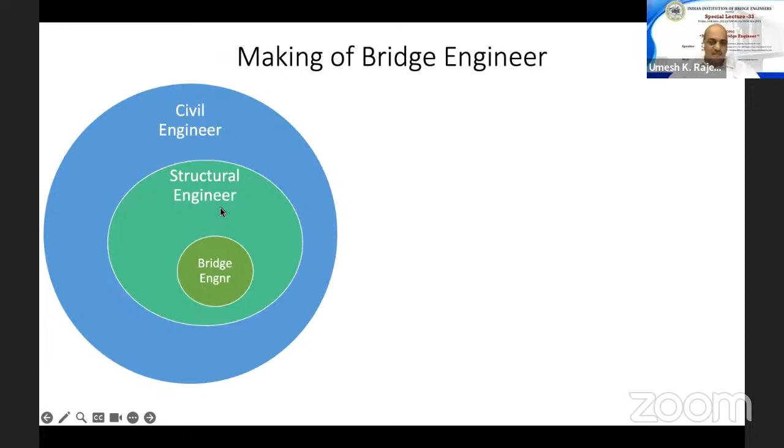In fact, to become a competent bridge engineer, first of all you should be a competent civil engineer, then you should be a competent structural engineer, and then the bridge engineer. So being a civil engineer, you should know about geotechnical, hydraulics, surveys, traffic, geometry, project management, and legal, contractual aspects, etc. Then there are the structural engineers.

Definitely, you should be knowing how the forces are flowing, loads, their response of structures to those loads, the material and their behavior in the long-term, short-term, etc. The design philosophy, whether it is deterministic, probabilistic, etc.

And with all these basics used for the particular bridge, you should know what are the various construction methods possible, or you can invent your own. Then how that particular structure is sensitive to specifics like traffic loads, wind, earthquake, etc. So all these things make a competent bridge engineer.

And once you are a competent structural engineer, obviously you can design many other structures like what we do here - natural draft cooling towers, tall chimneys, stadiums, or any industrial structure, and so on. So any good engineer can be a good bridge engineer, and he should know all aspects of engineering.

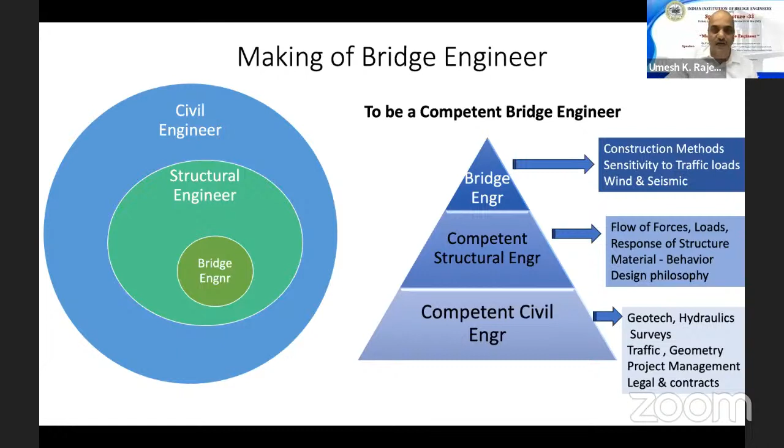I want to differ from what Vinay has told, about interest in superstructure versus substructure. I don't think it is that kind of a bifurcation. The good engineer should know all aspects of the particular project, including legal, contract, project management, and so on. So this is what I wanted to discuss in detail.

And the next is basically, it is a profession. It is a professional practice, and many times governed by codes like IRC, AASHTO, Euro, and so on. In some countries they are a legal document, in some countries they are just guidelines.

But all these codes or standards are prepared by professional engineers. So that is one of the tasks we should perform as a bridge engineer or structural engineer. And being a profession, to make a good bridge engineer, it needs an internship. It is necessary to work with experienced bridge engineers, at least for the initial few years, and that is very, very important as being a profession.

And obviously, as all of you told, it is a teamwork, a collaboration of all the experts in the field. And this role of professional societies, as Alok mentioned in his career path, is a very important aspect he told. The professional bodies like the Indian Institute of Bridge Engineers, or IABSE, or IStructE, or international associations like FIB, IASS, etc., play a quite big role in developing this particular profession.

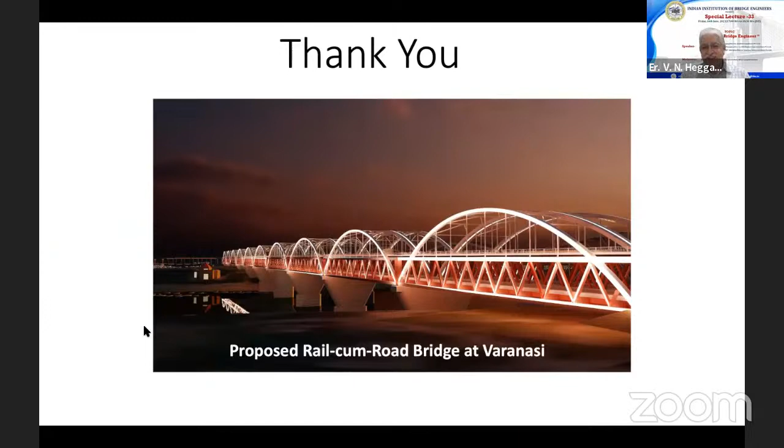Thank you, Umesh. That was a very concise and very incisive presentation, I should say. And you have given what it takes to become a very good bridge engineer. And in the process, you have also explained it's very important for people to participate in professional bodies' activities.

That's one of the important aspects. What I will do is, before taking the panel discussions, I just want to make a small announcement about our forthcoming event.

The Institution of Bridge Engineers is coming out with Bridge 2023. It's supposed to be a curtain raiser, so I'll give you the idea. This is one of the very mega events, normally a yearly event, that the Institution of Bridge Engineers holds.

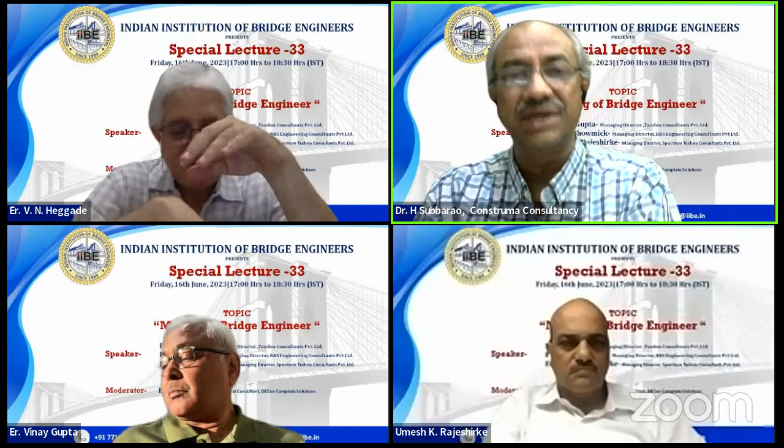If you have that drive to grow, if you have an agenda for growth, bridge engineering can surely be a part of it and drive you. There's nothing better than joining IIBE, or IABSE, or any of these fora where you can meet some of the great people, read some of the works, participate in webinars, events and discussions, join working groups, and grow as a bridge engineer. That's my message, that's my personal story, and that's my message.

Regarding the second part, Venkat, now that the emotional part is over, coming to the second part of the discussion, I'd like to ask, let's start with Raj because he had lesser time. Raj, when you started Spectrum, what were the challenges you faced? When you decided to strike out on your own, how did you muster up the courage, and what took you in that path?

You're muted. You are muted. Shirke, you are muted.

It was very simple. I got very bored in STUP. Nothing, it was such a stable job. I got fed up and decided to come out, have some destabilization, and started. That's all, nothing specific in mind. Anyway, on a lighter note — but you did probably have a... No, but that is how it was. And Alimchandani told me that you come back whenever you find that thing is boring.